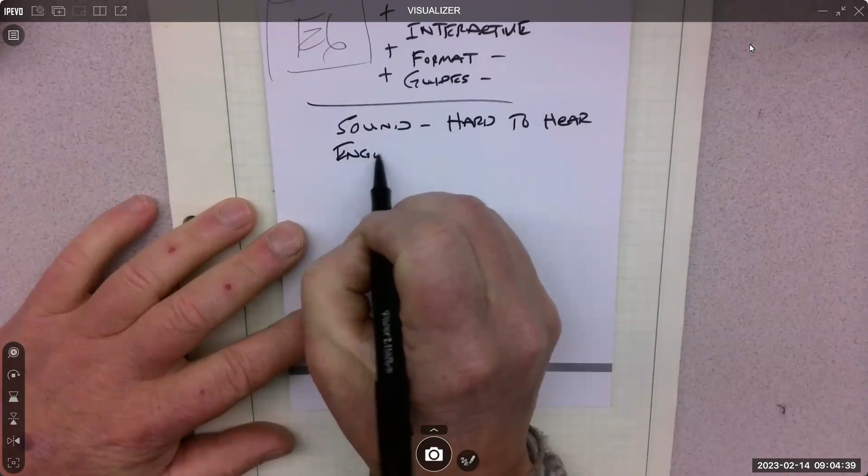Seeing the actual spaces, like there's an office space. Yeah, and it was nice to at least lay eyes on that, get a feel for where they're really working, they're locked in. There was one upstairs too, but visually we're not allowed to see that. Yeah, there was an upstairs, and I'm guessing that's where their cubicles were or their offices, whatever they have.

Yeah, it's nice to see though, and honestly every field trip is different. Like you go into Leatherman's engineering office and it looks different than an E6 office. And then I was just at Marx Brothers and they took me into one engineer's office.

And it was like, I've never seen so many big screens on a computer that were all curved. His desk was round and all these displays were curved and huge. I was like, whoa. It was cool, but I wouldn't want to sit in that little focal point for 8 hours.

All right, what else do you wish? We're doing I-like and I-wish on the field trip if you just walked in. So E6 has asked for feedback from you, not from me.

I think the things that, like, confidentiality that they were talking about, because there's probably a lot of things they can't tell us, but they'd rather. Yeah, I think the only thing they didn't answer that I asked was actual production numbers. I was curious how many they're producing per month. And I got a lot was the answer.

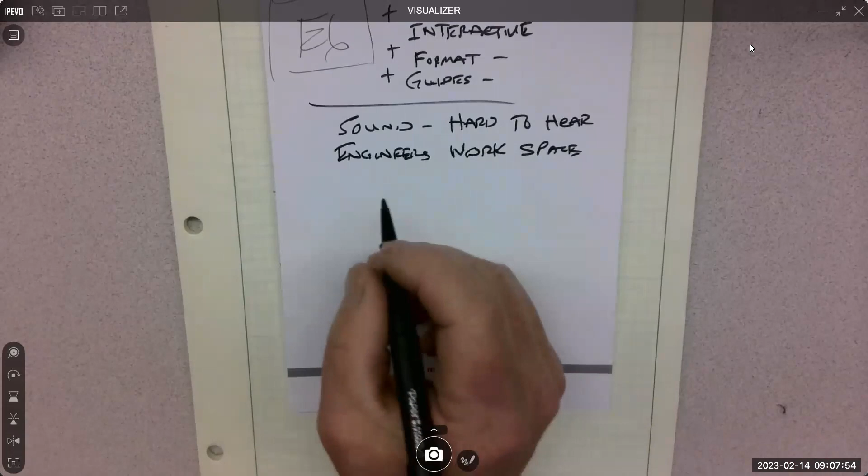Yeah, yeah. Good. It was close, I like that. I didn't make you drive downtown Portland or something. We've been to a lot of further places away that's complicated.

So I went to the Bonneville Power Administration at Cascade Locks. Went through the dam. It was a super cool tour, but that was a solid four hours.

And we didn't get engineers. Like, all that work to set this up, and then we just got Ranger Rick walking us around, and he couldn't answer any questions about the turbines, the generation systems, and the backup systems. Yeah, it was cool walking through, but man, we left with a lot more questions than we had.

All right, I think that's pretty good. Any questions about anything else so far? You're supposed to be working on the project. That is correct, all the time, day and night. You should be working on this project. There should be no other classes that you have other than this one.

Is there some kind of specific documentation during the prototype build? Nope, prototype build is literally bring in a functioning prototype. I will ask you what questions you're trying to answer with your prototype, because that's why we build a prototype, we're not sure of our own design, or we just want to confirm that this design is going to work. So we build a prototype and we go, oh, that didn't work, or this has potential to work.

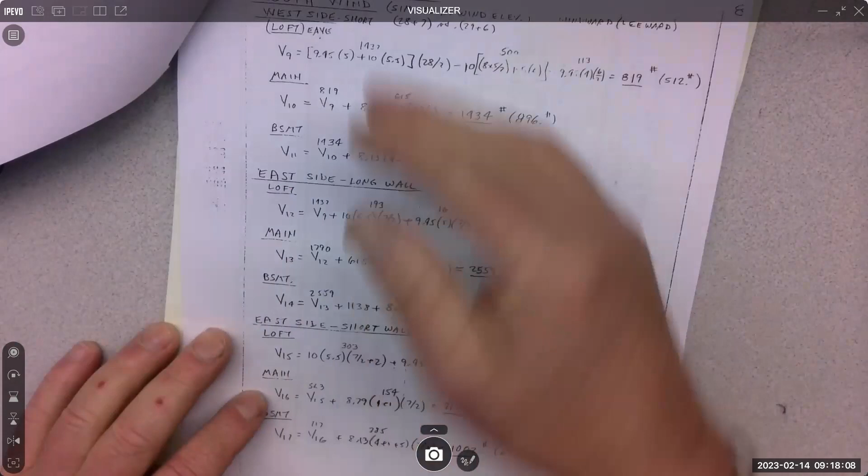So here's his. This looks like a wind analysis, south side, west side short. This must be a west side short wall. And then he's just flowing, left to right, top to bottom, working his way through it.

Okay, these are all shear calcs because this is a lateral load document. Lateral load is the structure doing the lateral deflection, right? Like a wind load or seismic, although he's very careful not to put seismic on there—he doesn't want that responsibility. But again, just fairly nice and neat, flowing through the equations.

Shear is V, so we're not going to do shear today. We're going to do bending, but that's all right. Make sense? Kind of like the flow and the image of what we're looking for.

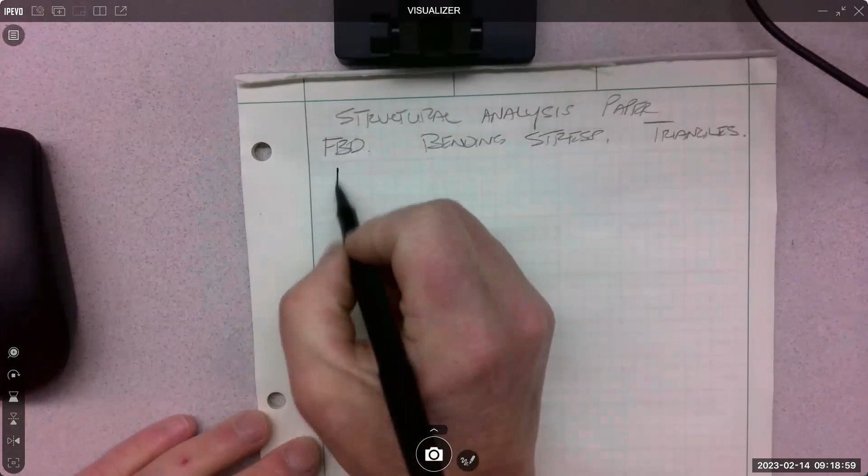All right, so you're probably going to end up with these pieces of the structural document. You're going to end up with a free body diagram. That's what this is called, free body diagram. And that means we're going to take a system and just draw it and put the vector loads on it.

So the example I'm going to use is this one right in front of you, where I have a beam laid out between two supports. Like if this was yours, I think we're 8 feet apart—is that correct? Yeah, so let's say it's 8 feet. I think this is a bit longer than 8 feet, but that's all right. The free body diagram for that would look something like this.

Simplified beam. And then over here at this point, the object has weight, right? It's acting down. So all these forces we want on the free body diagram. The weight of this thing, I'm going to say, is 2 pounds. Okay, we have scales, you can weigh stuff. So your numbers will be real, and you should weigh them so you can draw a good free body diagram.

But anytime we put in the weight of an object, anyone know where that goes? Ben's not here yet, he's got to take a few hours to wake up—he told me that yesterday. Weight of an object—so the weight of me, if I was going to stand on this table, where do we put my weight? Do you think it's going to be out here on my arm, hanging down? It's going to be what? Yeah, it's going to be center of gravity.

Exactly, geometric center, right down through the middle. And that's an approximation even, because I'm not homogeneous. Anyone know what homogeneous means? The same throughout—I'm not made of the same material, I have all these different kinds of materials in me. Even this piece of wood is not homogeneous, right? What's different about wood? What's it have? Yeah, grains, knots, all kinds of deformities, right? It is not homogeneous—we like to say it is, but it's not at all. All kinds of defects in it too. But for this analysis, we're saying it's homogeneous.

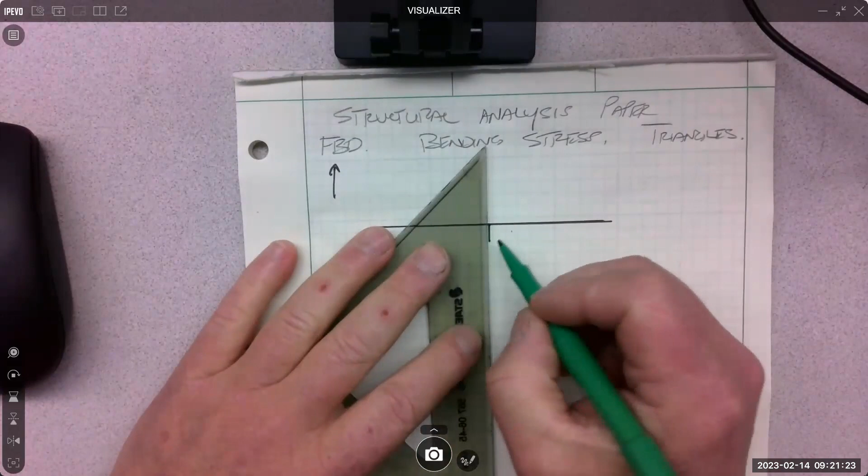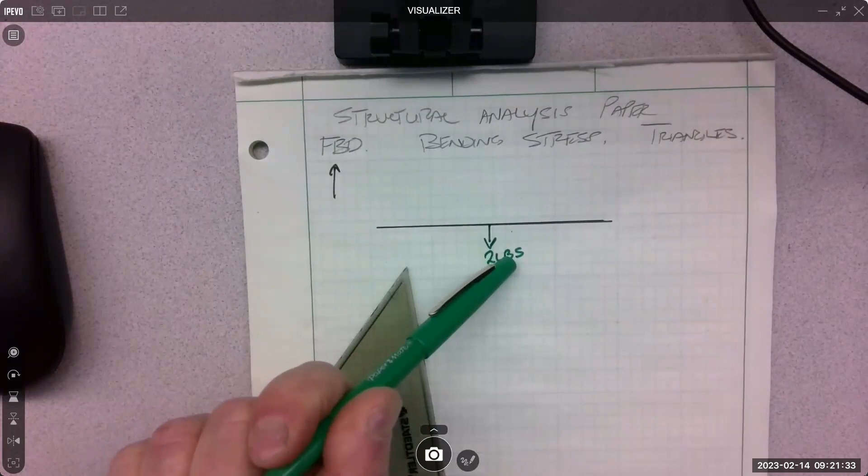If this thing weighs 2 pounds, then I'm going to take the 2 pounds and put it through the geometric center. 2 pounds—we put it in as a vector, which is just a line with an arrow on it. Okay, that's a force vector. Now what's happening at both sides?

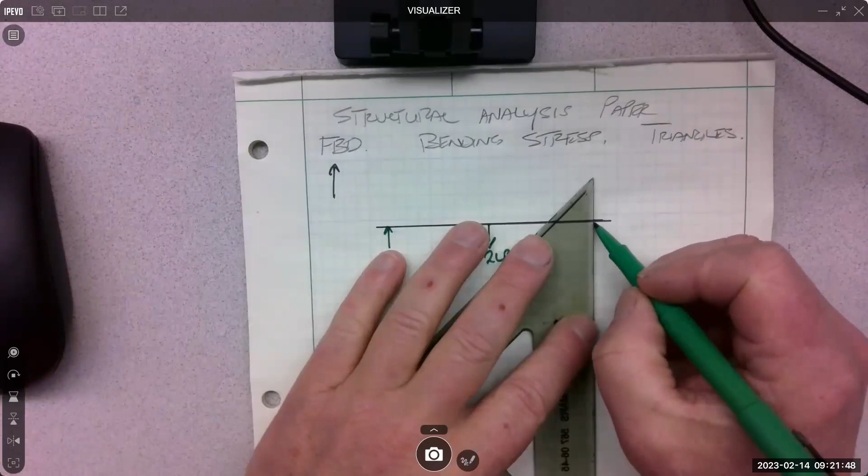Because this thing's just sitting here, right? It's not going anywhere. There's supports on both sides, right? So the table is pushing up and pushing up. This thing called equilibrium means that all the forces in all the directions are equal to zero. If they're not equal to zero, something is just flying around, okay?

If I didn't have gravity, I'd just fly around, right? If I weighed too much, I'd sink into the ground. If this building weighed too much, it would sink into the ground, but the ground must be pushing back up to hold the building in place, because it's static currently, right? So how much has to be here and here? We're kind of symmetrical—we got 4 feet and we got 4 feet.

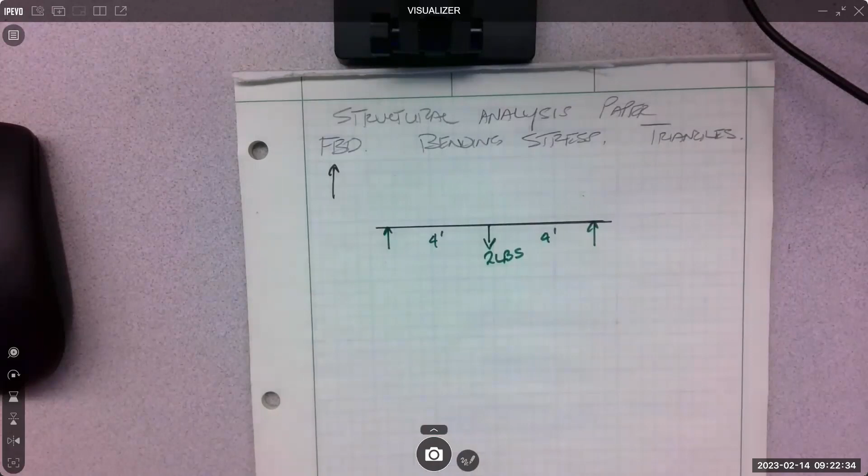So if all the forces in the y direction have to be equal to 0, how much does this have to be? Roughly a pound. Probably not roughly, it's got to be exactly a pound, right?

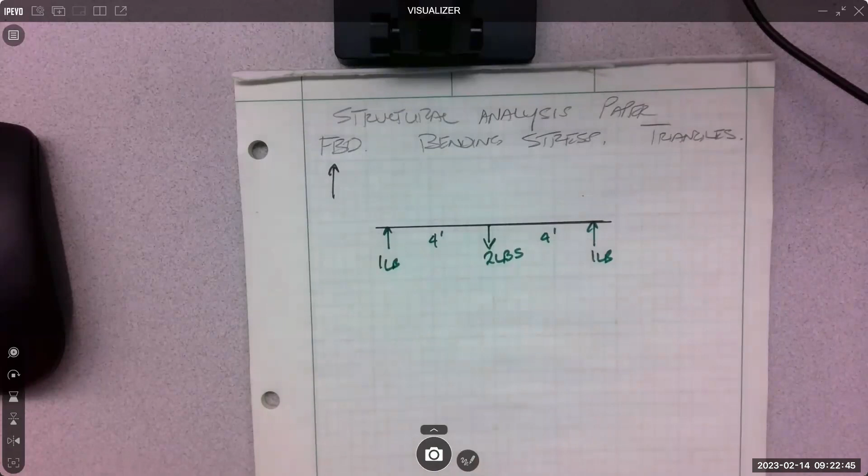For this to be true, we write that sum of forces in the x equal 0. That's equilibrium. Sum of forces in the y equals 0. That's the case we have. And then there's this thing, sum of moments equals 0.

Anyone know what a moment is? Yeah, that's what some normal person out there would think, but engineers, we think differently. We have to name things special, so no one else knows what we're talking about.

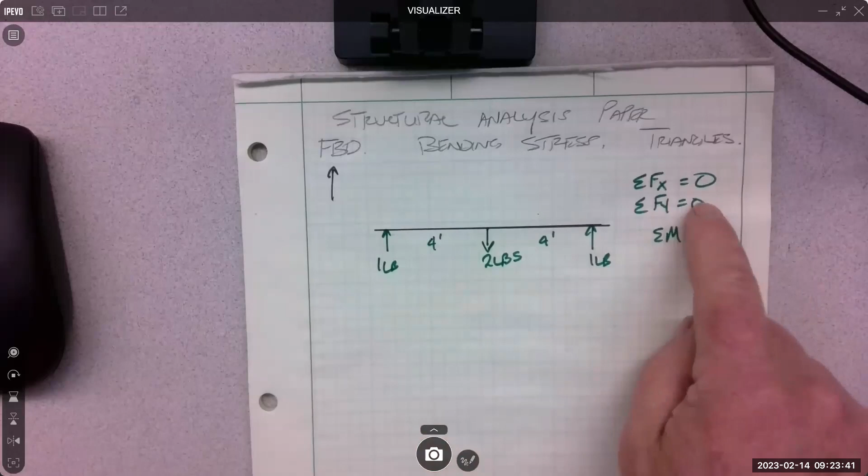A moment is... so sum of forces in the x, everyone knows the x direction, right? Positive x is that way, negative x is that way. So forces in x is lateral movement, x direction. Forces in y is what? Up and down. Yeah, so those are the two translational forces and directions that we have, x and y.

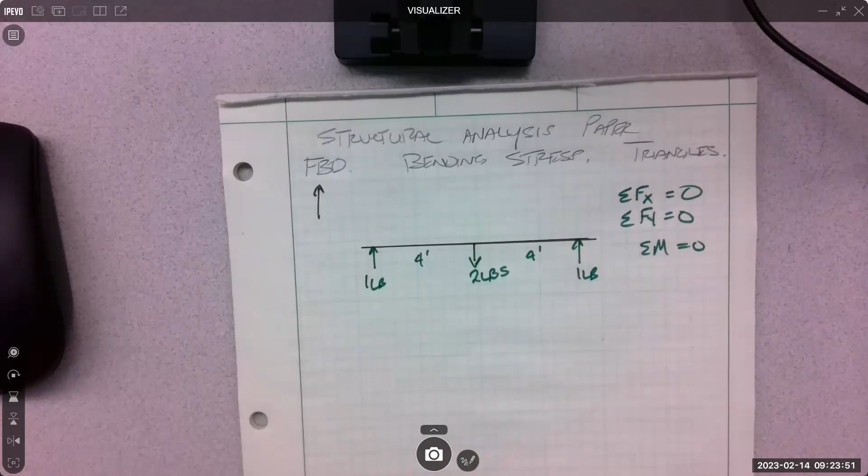But there's another effect that happens due to forces, and that is rotation. So a moment is a rotation, better known as a torque to most people in the real world. That's like putting a wrench on a bolt, putting some force on it, and it rotates, right? So that's not translating the bolt this way or that way, but rotating it. Those are the 3 effects that we deal with.

If all of those are 0 on this structure, it's not moving. If there's an extra moment somewhere, this thing is tipping over. If there's extra y forces, it's sinking into the ground. If there's extra x forces, then it's like shaking off its foundation. Okay, but that's it, all of those.

Ben. At some point I'll probably label it up. Yeah, because we're going to have to do more shenanigans. Ben would like me to label all my points.

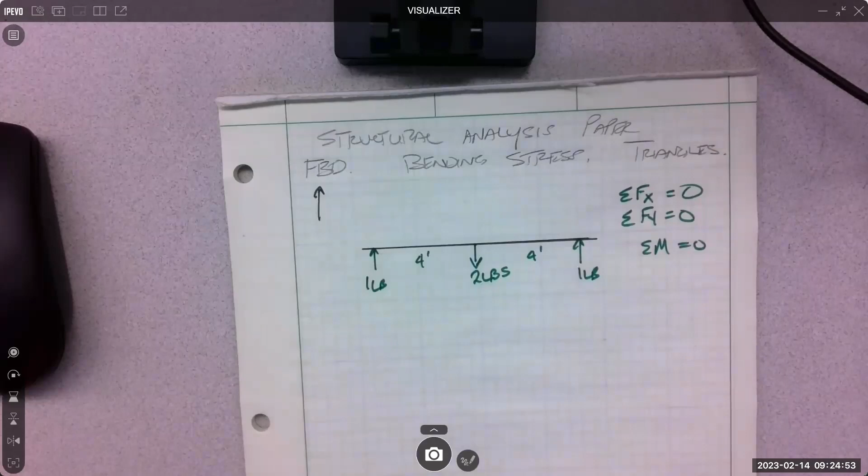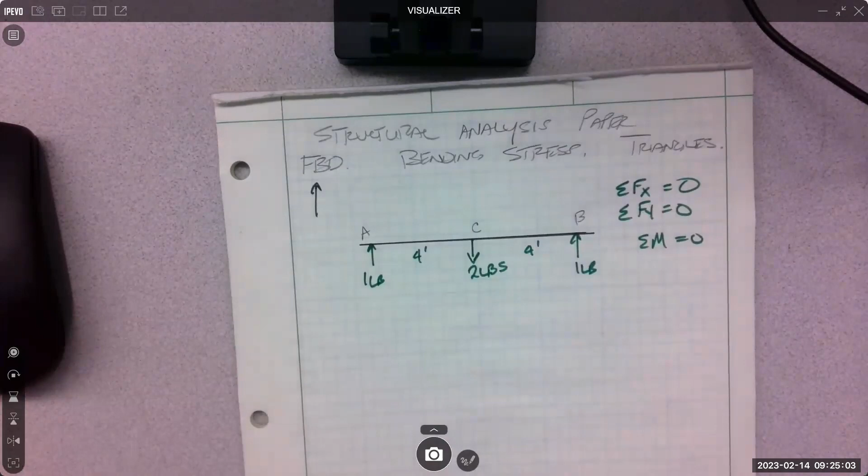So I have a point A, a point B, and maybe a point C. And it's not a bad idea because then I can say, hey, let's look at C, or hey, let's look at A, right? Okay, but that's a free body diagram.

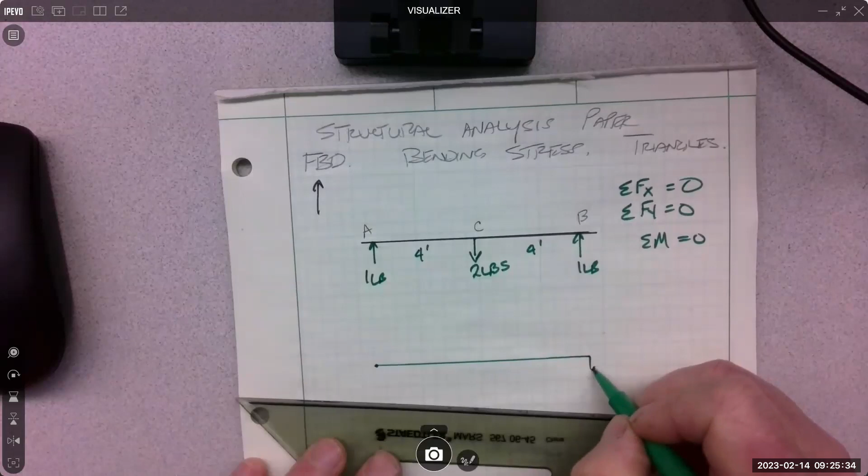All right, if you're going to take your 4-ounce weight and put it on the end of a stick and then just go like this and hang it out there, everyone follow me, like a cantilever or a fishing pole type thing, then the free body diagram looks different. It's still a pole, and we still want to draw it as a snapshot in time, so maybe here's my 4-ounce weight. I'm going to call it 0.25 pounds, right?

So a free body diagram is just a snapshot in time, and it's usually the worst time, like the worst loading condition. That's why I drew it like this. I didn't draw it straight up with the 4 ounces hanging straight down because that's not a bad loading condition, unless your pole is super flimsy and then it buckles, but that would be a whole different analysis, right? So I draw it in the condition that I'm really worried about, that condition.

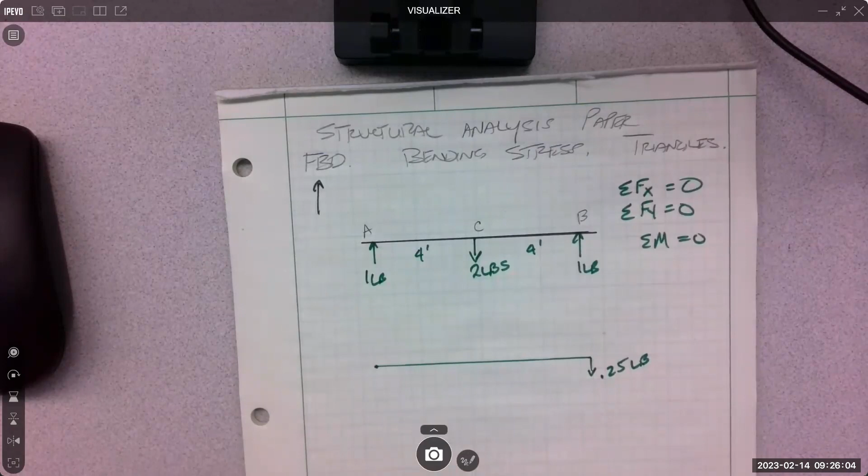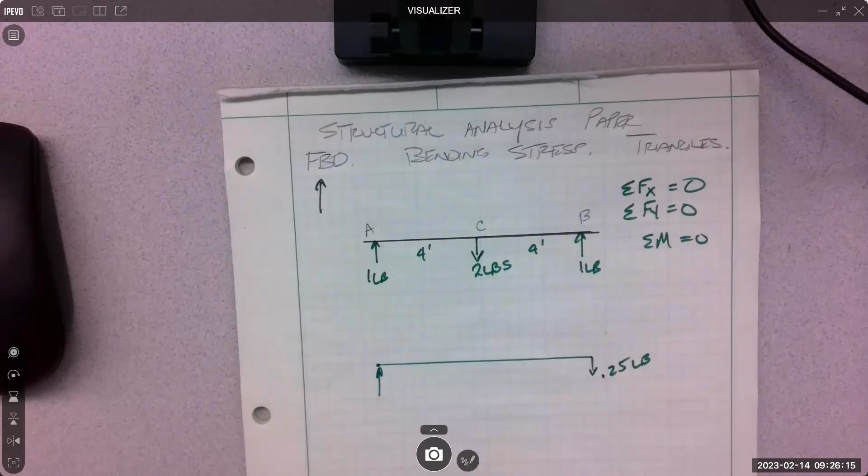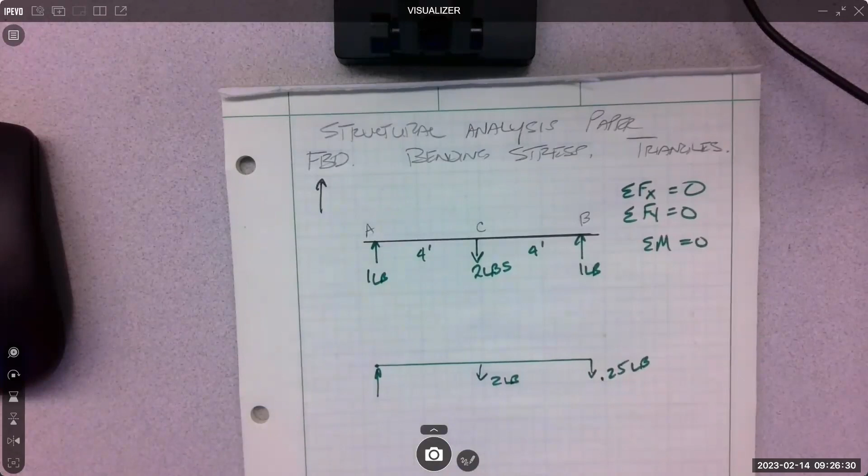So what's fighting this down force? Yeah, whoever's holding it is putting in an up force. And how big would that have to be? Oh, we should probably add our 2-pound structure. Right? It still weighs - I'm going to use the same structure. So how much is coming down? 2.25. So how much has to go up here? Same thing.

Right? But what else is happening? There's no up force out here. What's this pole trying to do? Probably bend, but if we just kind of didn't support it, what would it do? It would rotate. It won't fall because we're still going to give it this up force. But instead of my arm holding it out here, if I just let go of it, it's going to rotate. This thing wants to rotate. All this wants to rotate.

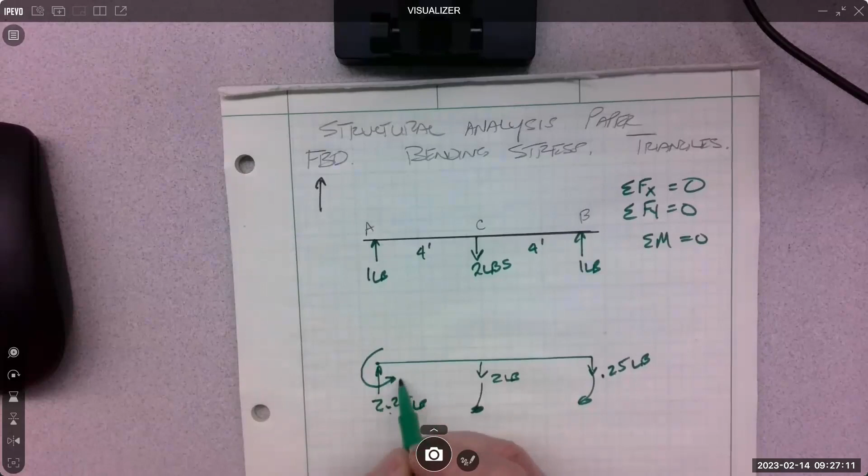So then we have to fight it with what's called a moment. So cantilevers - this is a cantilever where there's no support out here. We have to have a support system that will fight that moment. You know, if you're fishing, it's you holding the fishing pole. If you let go of the fishing pole, the pole rotates, is gone, right? The whole structure also has to resist that rotational effect. If it doesn't, then it breaks, right?

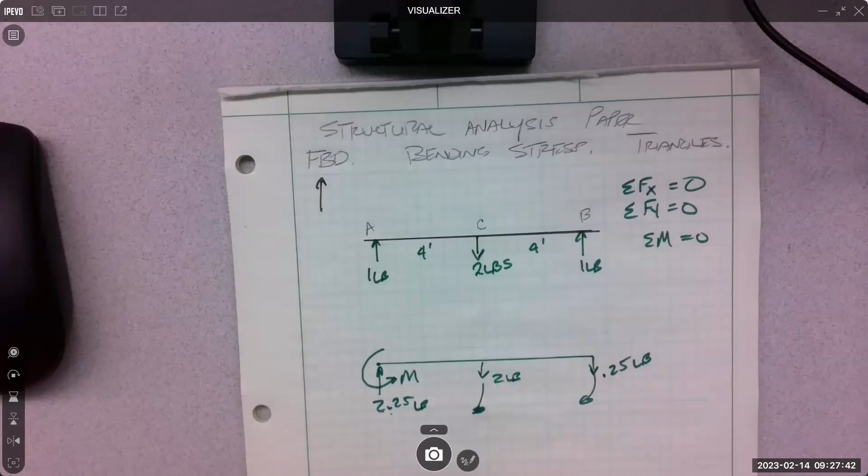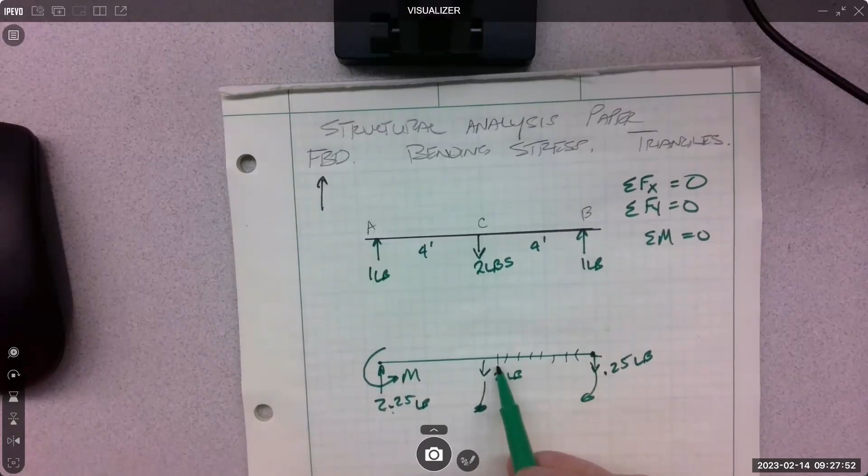And out here at the very end, there's no rotation. That's just a free end kind of dangling out there. But as I walk it back, that moment gets bigger and bigger, that rotational effect, until I get right here where this moment is huge.

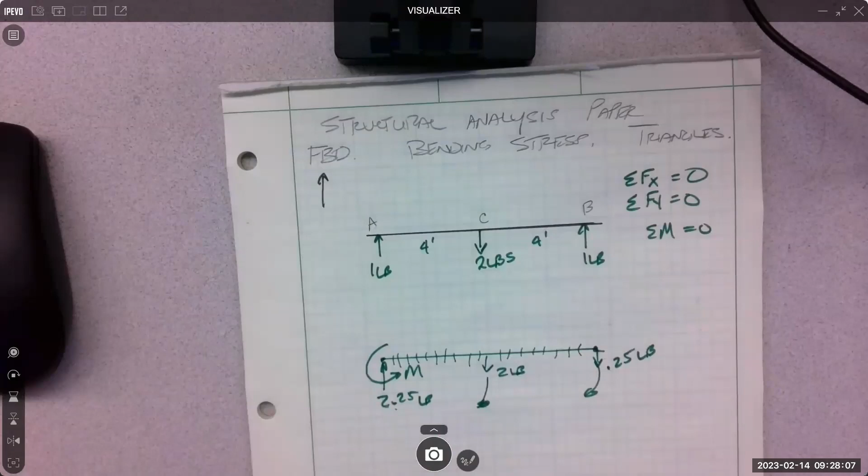That makes sense? Just in super basic terms, kind of like, hey, this is how a fishing pole works, this is how a cantilever works. This is called a simply supported beam. It's got supports at both ends.

This is what we do. You drive across a bridge, you're hoping that it's simply supported at both ends with enough foundation to carry the weight of the bridge, which is way more than you and your car. The weight of that bridge is enormous. So the overall structure of a bridge is really to hold itself up and then let you go across it. It doesn't really care much about that.

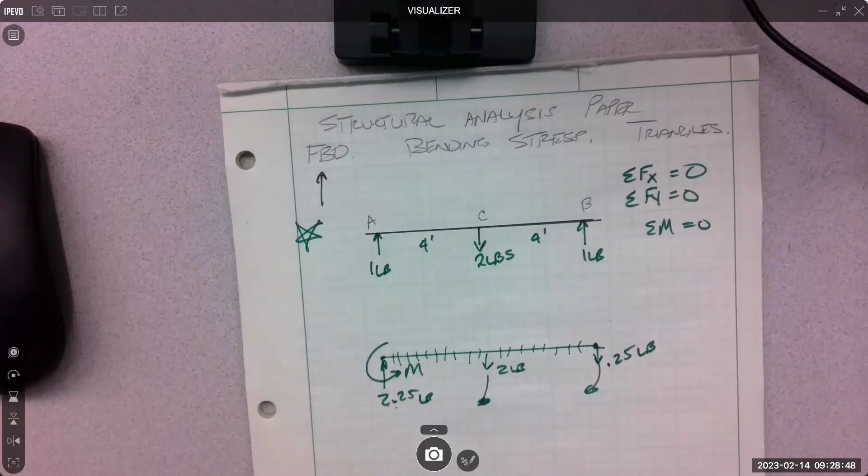Okay. Simply supported bridge, correct. Yeah. So really what we do with bridges, let's talk about bridges, because that's another area I wanted to hit on, because they are typically built out of what?

Yeah, very few are just straightaway beams. You'll cross a few that are just the smaller bridges, overpasses that are just big concrete beams, right? Massive concrete beams, have no upper structure to them. That's just a beam bridge, right?

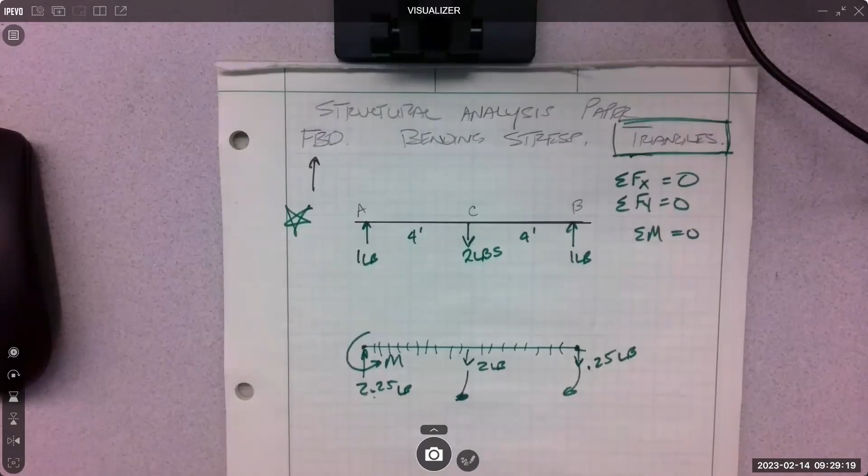Those are usually smaller. If you're going to cross the Willamette, then you're going to go across something that looks maybe like a triangle. So maybe it's one big truss. We call these trusses, or triangles. Or maybe it's a collection of all kinds of little ones.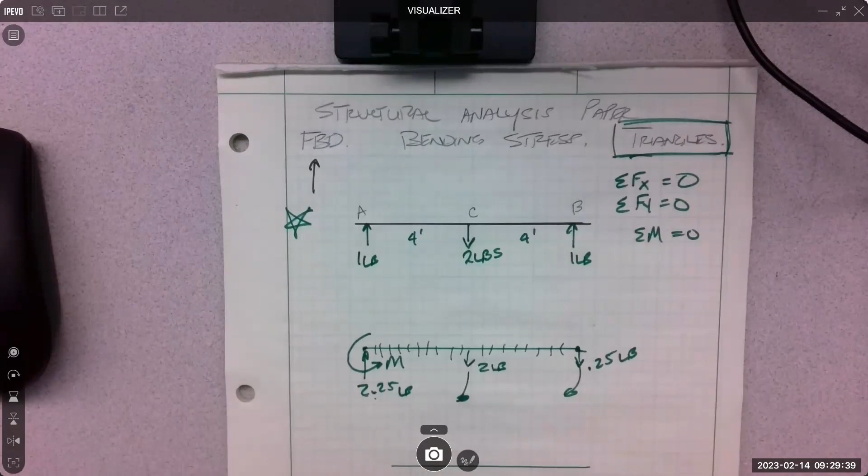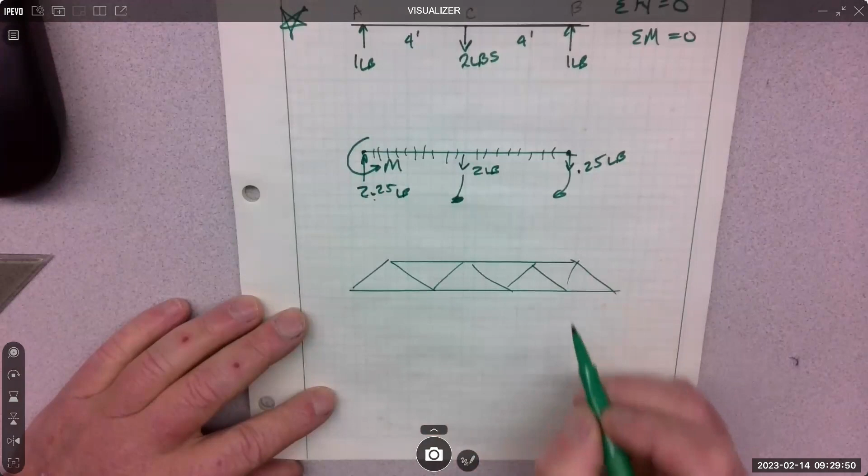For the sake of time, I'm not going to get too fancy with my drawings, but there's all kinds of them, right? And then we can even drop some verticals in. Sometimes we don't drop verticals in, but then we're going to simply support it.

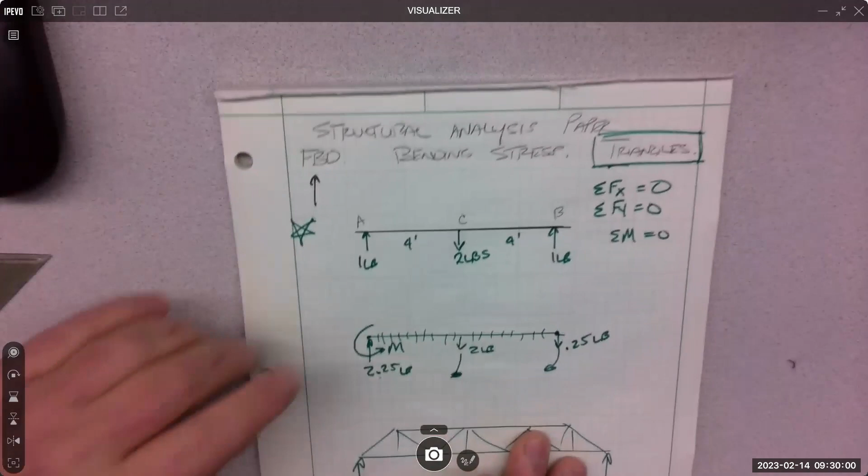This is no different than this. The worst case scenario for loading condition is a big load right there. The entire weight of this bridge acts through the geometric center.

Okay, and then when we drive our car across there—and actually we don't use cars, we use big semi trucks typically—but as we drive whatever we're going to drive across there, we put it right in the middle, and that's where we do our analysis.

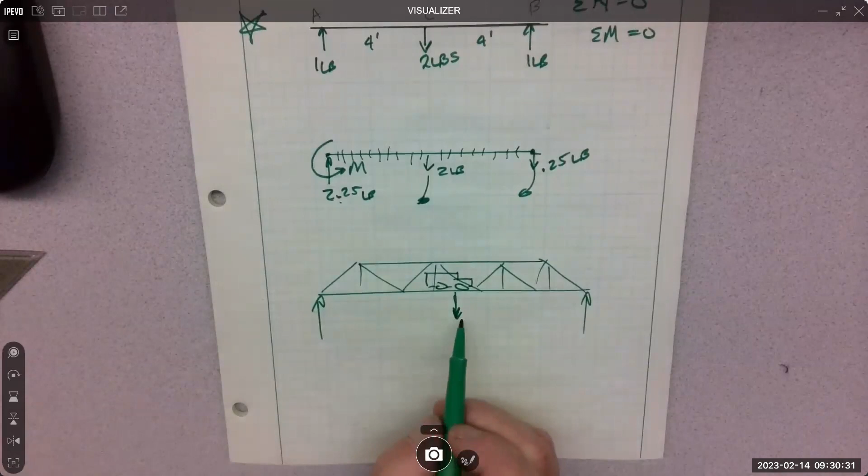So for example, the large bridge downtown Portland—why can't I think of the name of that bridge, our biggest one—not the Fremont, maybe it is the Fremont, the giant one, yeah, the double decker. Yeah, that one, its loading design condition is our worst snowstorm, our 100-year snowstorm.

So we put a bunch of snow and ice on it, and then we line it up, upper deck and lower deck, with the heaviest semi truck that is allowed to go across it. Stacked up traffic jam, full on. That's the loading condition that thing's designed for, which it'll probably never see, right?

But if you go across that bridge and you ever get the chance, like in a traffic jam and you're stuck on it and the other deck is still moving—like if your upper deck stopped and the lower deck is moving—that thing is bouncing a solid 3 inches up and down, just really flexing nicely. Super creepy, but it's cool.

Yeah, so we designed flex into them, right? But notice what it's made out of: triangles. So if you're having rigidity problems, think about adding some upper structure or triangles. That will help your design.

Okay. I'm not going to go into any analysis there, but when you take statics, you'll learn how to transfer all these loads through the structure.

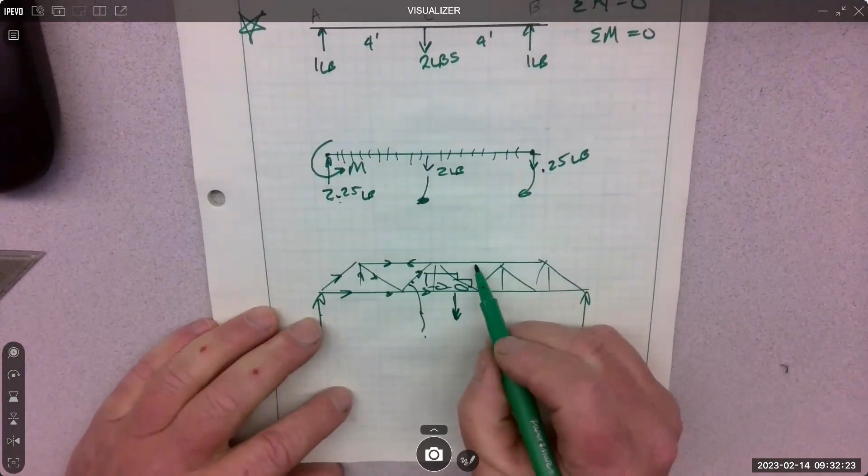And calculate it. So as we do that, as we learn that, then we look for the highest loaded member. So maybe it's this member that's the highest loaded, and then we design to that highest loaded member, right? And then we make all the members typically the same. Some of these top chords might be smaller, some of these bottom chords might be bigger. But that's essentially what you learn in statics, is how to transfer those loads, both through a structure and through a truss system.

Because if you crawl up into your roof, most of your roofs, if you're in a home or even an apartment, if you get all the way up to the roof, that's going to be a truss of some kind. That's what we do. All right.

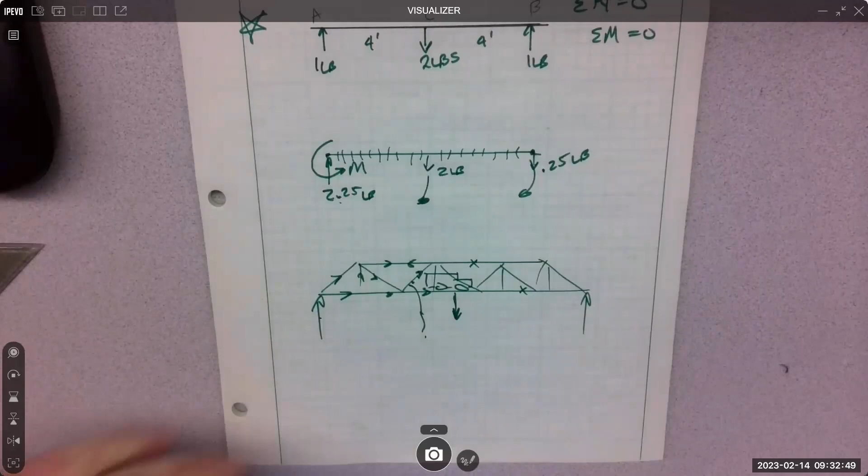The other thing is bending stress. This is a calculation I hope you do. So we need to talk about bending stress. This is S for stress, B for bending.

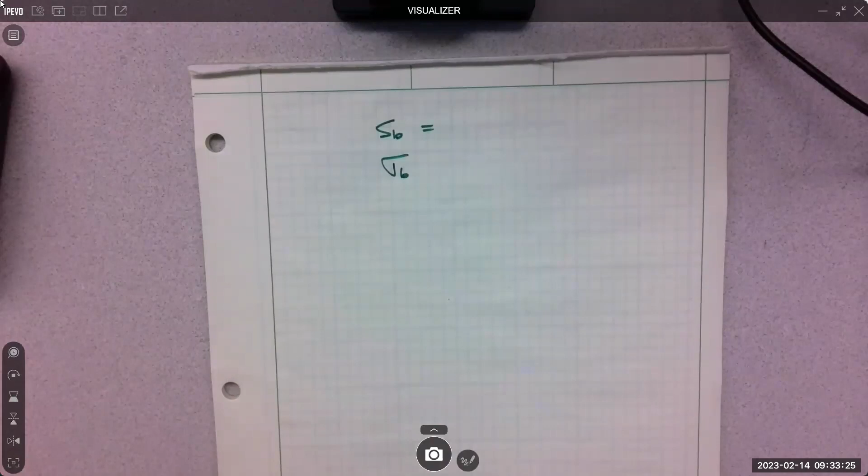So some will use sigma. The Greek letters come into play real quick in engineering. When you go through your statics, your strength, your dynamics, your fluid mechanics, you get a lot of Greek variables. I don't know where that came from, but we've done that forever. So some books will use S for stress, some will use sigma for stress. B would refer to bending stress.

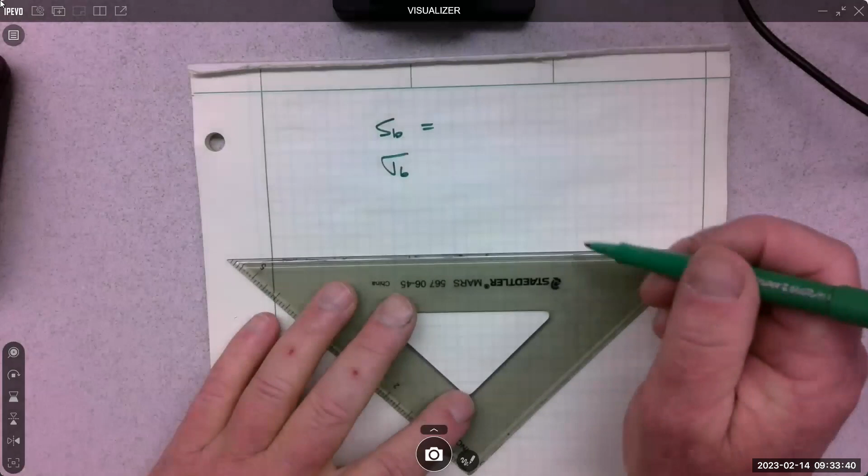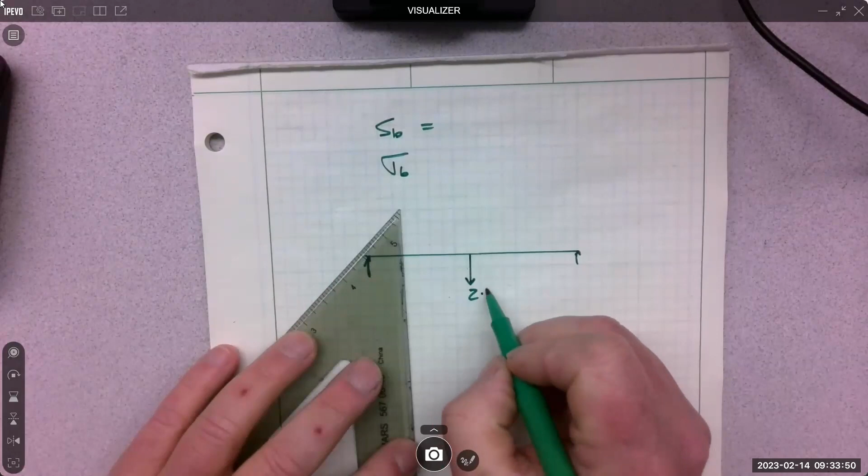Going back to my simple system right here, and I'm going to stick with 2 pounds, 2.25, because my little ball, my 4-ounce weight is coming across and I'm stopping it right in the middle. That's kind of the worst loading condition, right? So now I've gone to 2.25 pounds and I have 4 feet and 4 feet. Bending stress is MC over I.

So we have to understand the 3 variables that are in bending stress. The reason you would calculate a bending stress is you would want to compare it to a material. So if I'm using wood, I can look up Doug fir allowable bending stress. The wood industry has dialed that in for me as an engineer. The steel industry has that dialed in for me as an engineer. They know the stresses of all the different alloyed steels out there. Strength of materials is where you'll learn all about those. But what we do is we calculate a stress and then we compare it to something.

If you're using cardboard, you got to find the stress, bending stress of cardboard. There's some out there, there's not a lot of great data out there. So find what you can and use that as your comparison. I'm going to do it to this wood, and I'm going to call this wood Doug fir. It's a common wood in our area. And the allowable bending stress, so SB allowable, I'm going to say is 900.

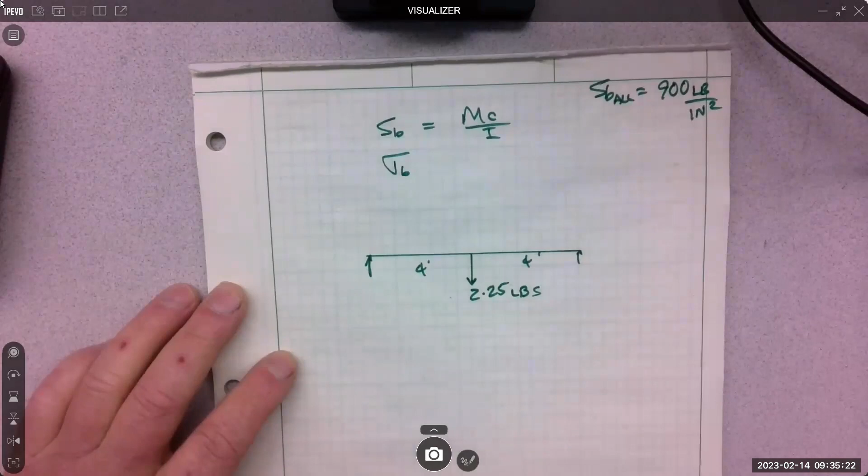So stress is in what? Check that out, what is that? Pounds per square inch, also known as PSI. It's like a pressure, right? And it is a pressure. It's an internal fiber pressure. It's a pressure on all the little fibers of Doug fir. It's not very high. 900 is pretty darn low, right?

If we think about mild steel, 36,000 PSI. Much different. Steel's a lot stronger than wood. That makes sense. But I have an allowable limit of 900. So I have to figure out, based on this load condition, how much bending stress is there on my little piece of wood, right? And then I make that comparison.

So if I come up with 900, what do you think? If I come up with 900 PSI of stress on my wood and I compare it to 900, is that a good or a no good? It's no good because we're right at the limit. Yeah, so maybe good, but with no factor of safety at all. 0 factor of safety. Well, just so you know, the wood industry's already done all that factor of safety for us. So we can go right to an allowable when it's given. That industry has done all the factors of safety for the material.

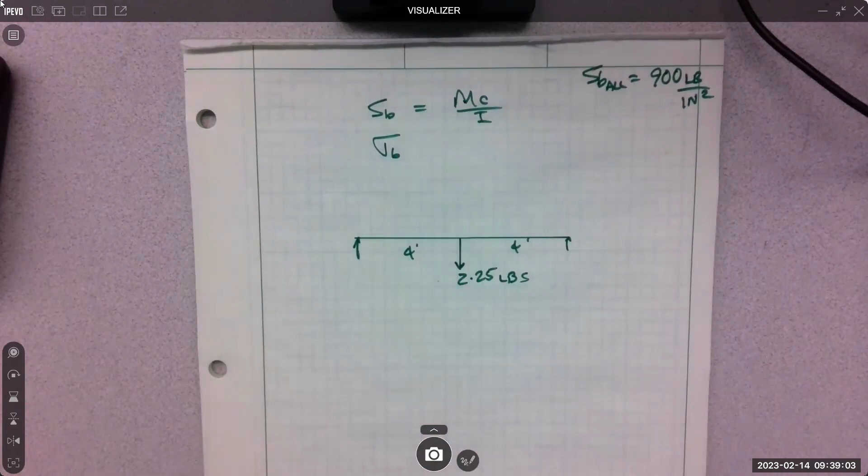The way we calculate this is we have to find the moment based on the loading condition. From our free body diagram, we find a moment, and then we have to calculate a C, which is very easy, I'll explain that. And then we have to do inertia.

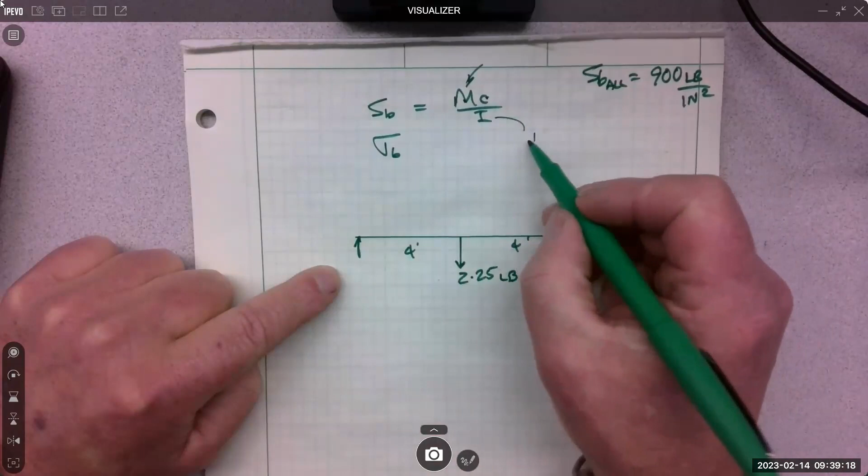When everyone thinks of inertia, they think of moving parts. This is not moving parts. This is static, it's equilibrium. It's just sitting here, it's doing nothing. So this is what we call area inertia.

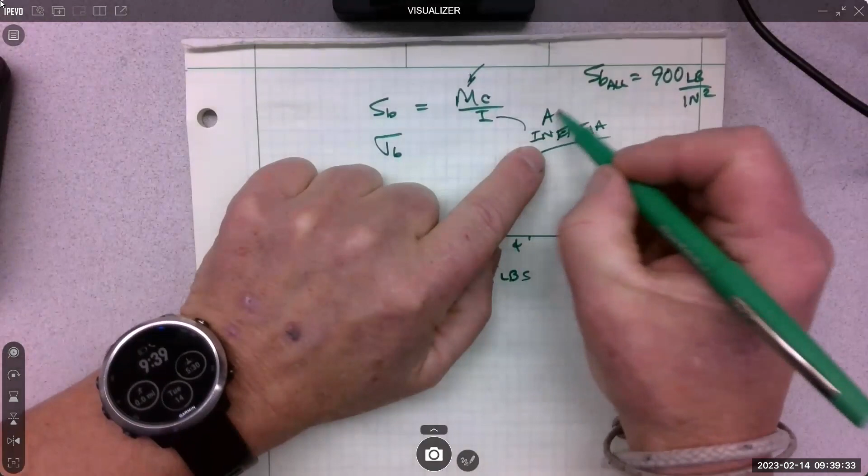It has to do with the cross-sectional area. Does everyone know what a cross-sectional area is? So like you have a tree growing, right? And I take a saw and I chop it in half. What's that area look like? Yeah, it's round, kind of round.

That's the cross-sectional area. So here's my beam. What's the cross-sectional area look like? I don't even need the dimensions, but what is the shape? Is it square or rectangular? Yeah, so that cross-sectional area looks like this, in that position. The other position it could be in would be like this. Everyone get that? That's cross-sectional area.

Both C and I deal with the cross-sectional area because it's so important to its ability to resist bending, and that's what we're talking about, resisting bending. Notice that C and I have nothing to do with what it's made out of, it's just the cross-sectional area.

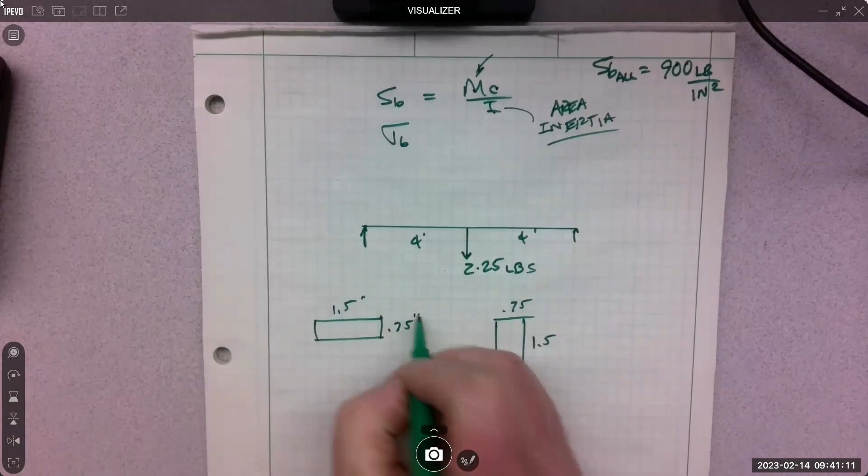That could be a piece of aluminum of that same shape, and we're going to say it's 1.5 by 0.75 inches, okay? Cross-sectional area, that's all that is. C and I deal with this cross-sectional area.

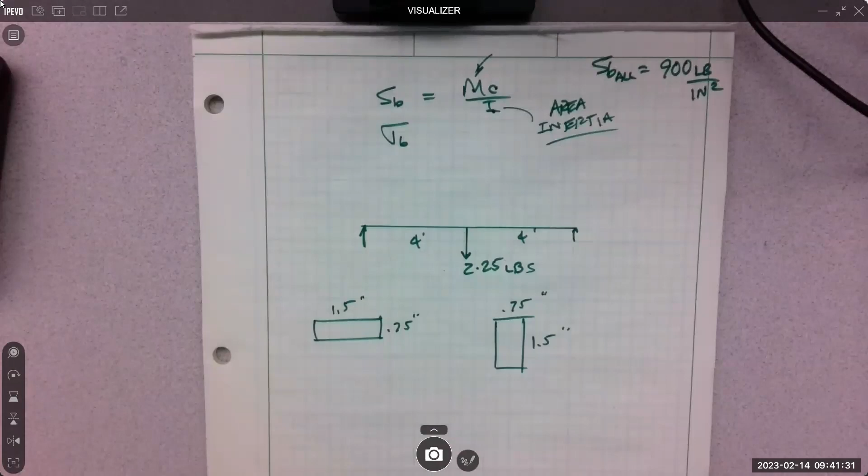This is area moment of inertia, I, and you can look it up for any shape, it's typically a very simple equation. So if you have a beam kind of like this, simplify its shape if it's complicated, and calculate an inertia. An inertia for a rectangle is base times height cubed over 12. I could have looked it up, I didn't need to, I use it all the time.

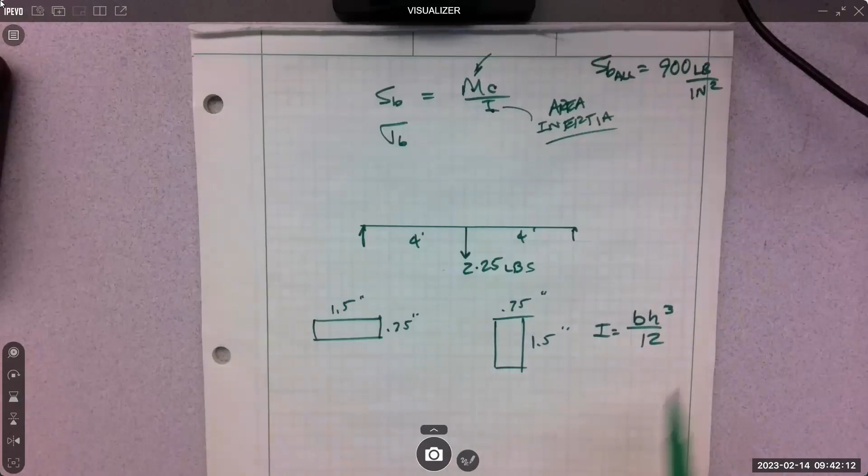We are addicted to the rectangular shape because if you're going to use a wood product, it comes in a rectangle typically, and we use a lot of wood products. That's why all our trusses in our houses are made out of wood products. So this gets calculated from the shape.

Here's a rule of thumb: the higher the I value, the better resistance to bending. This is just talking about shape, not that it's made of wood, it could be aluminum, gold, diamonds, whatever. I don't even care because inertia doesn't care, inertia just deals with the shape. The higher the inertia, what? Better resistance to bending, and we want to resist bending.

That's what we want. So if I calculate it on this shape, that's the current shape, I have it in that position. Agreed? So what is it? What's the base? 1.5. What's the height? Get your calculators out, divide by 12.

Come on, this is it, this is a gold mine. After this class you can go out and make some money doing this. Well, maybe not yet, but soon. What's my inertia value? 0.0527. So you went 1.5 and 0.75 and then you took it to the third, correct?

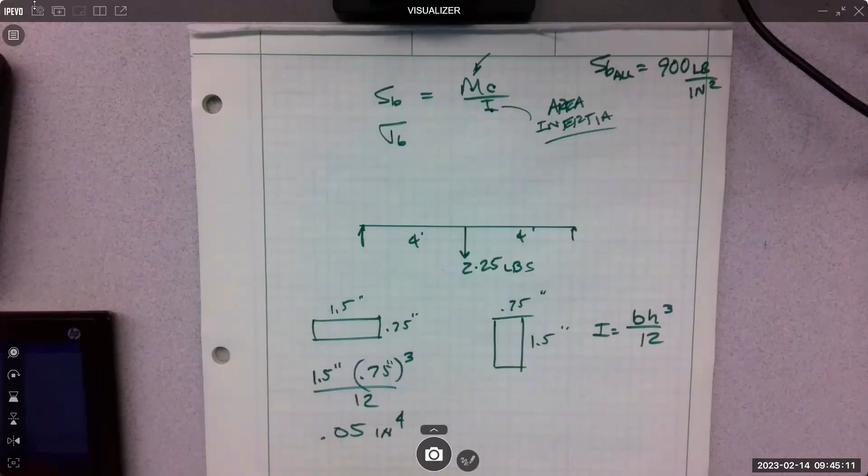And if you look in the book, it'll say this is a very abstract unit. It is super abstract, right? So small number, how do you think it does in bending? Not very good, right? Let's do it in this position. That's just taking this and putting it up on what I call the strong axis. What is it over here? Base is 0.75, height is 1.5.

You better figure it out. You need a calculator.

So 1.5 to the third is what? 0.75 times... 12 divided, I get 0.21. Anyone else get that? 0.21? Yeah, yeah.

Like magnitudes better, still a super small number because this is a tiny little beam. But everyone agree that 0.21 is not just a little bigger than 0.05? This is 50 thousandths, this is 210 thousandths, so we're talking magnitudes bigger here. This should resist bending, correct?

All right, everybody come up and walk by the beam. Come up, walk by the beam, put a little load in the middle, and then move on. Just push down on the beam, move on. So someone else, come on, keep moving, keep moving. Move, take that off of there. I didn't say put a load on it.

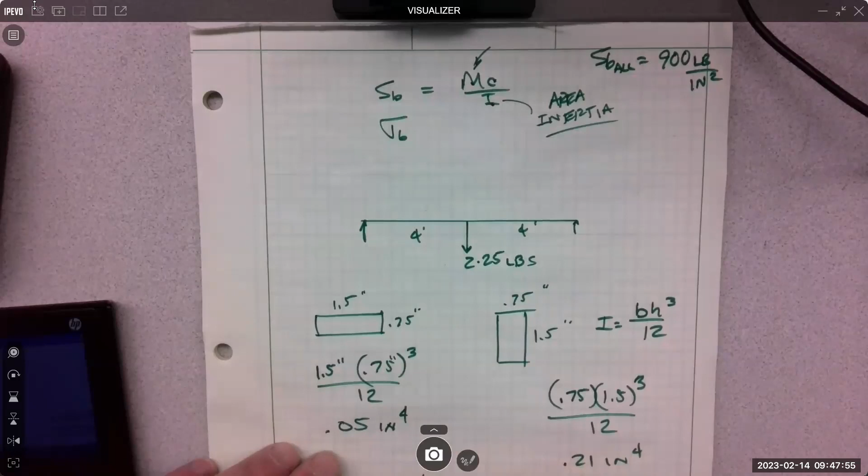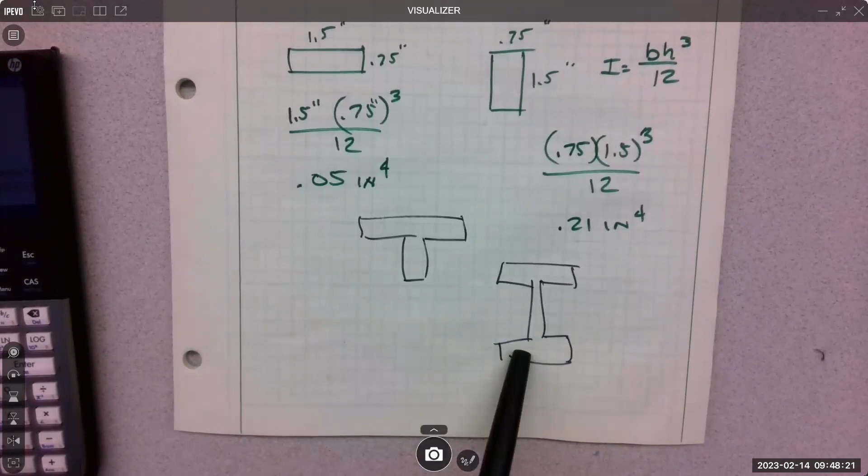All right, that's inertia. If you build a really cool shape like this, maybe a T shape, or maybe this. What's this called? An I shape. It's actually not, that's what the general public calls it. It's a W shape for us. W stands, I know, I'm sorry, but welcome to engineering. It stands for wide flange. So this is a wide flange.

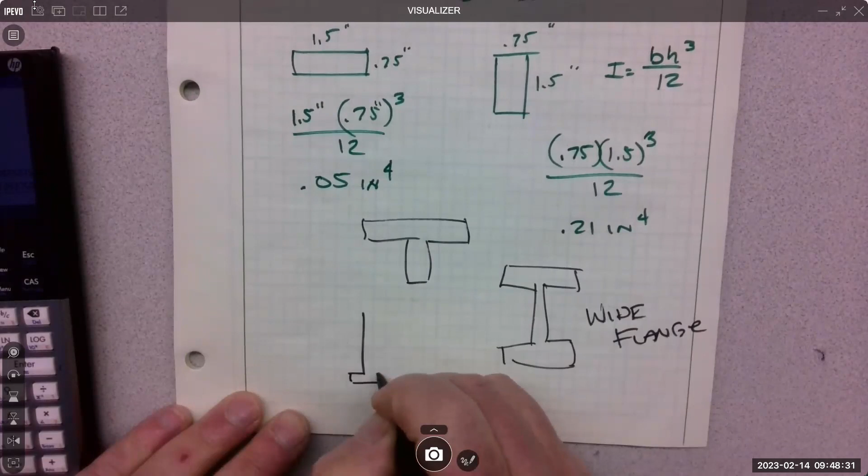We do have I-beams, but I-beams look like this. They're super tall and they have a tiny little shape. And we started with I-beams in this country. That's what we thought was like the cat's meow, man, it was the best. Well, the problem with I shapes is they want to rotate. When you load the heck out of them, they just want to go and rotate. So we fought that with developing wide shapes, and now we predominantly use wide shapes.

Like a ratio rule that separates? Not really, but it's so obvious. When you see the two side by side, it's like, oh, the I-beams, their flanges are so tiny. Like we get so much load out of this web. This is called a web. We get a ton of load carrying capability. That's why we did I's, right? We can just carry so much load.

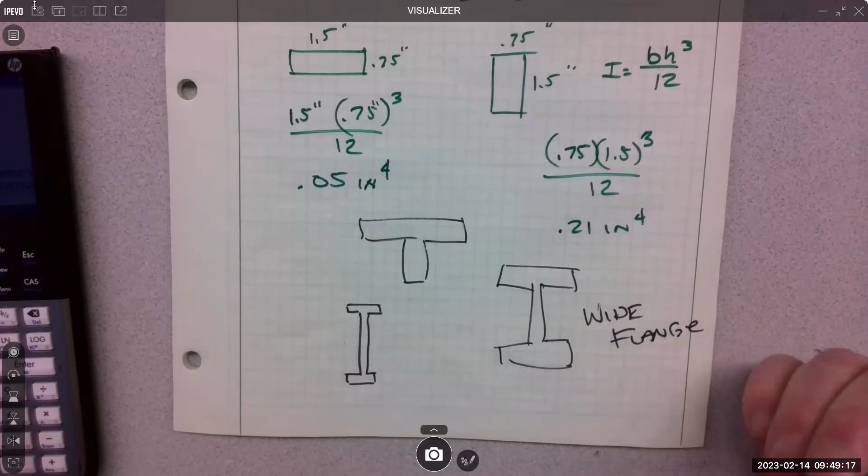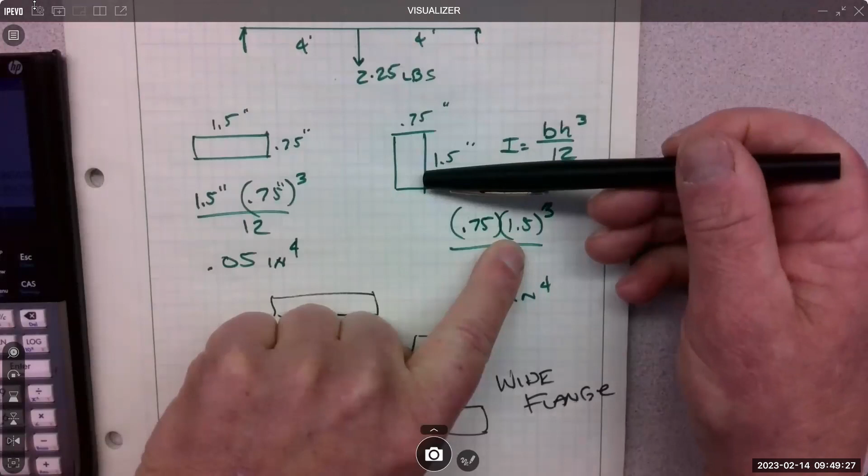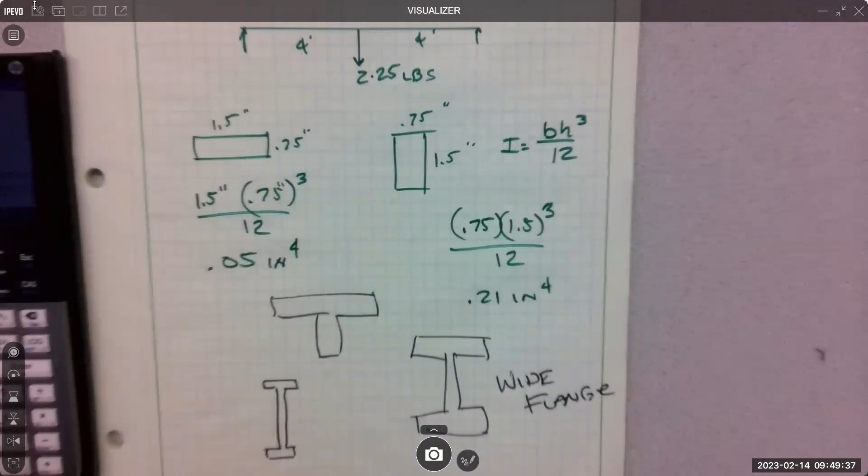The further you get away, what are we cubing? The height. So the bigger the height, the more resistant to bending. It was simple, we just make these things super tall and we can resist a whole crap load of bending. And then they were rolling over and failing. It's like, how do we resist that? Oh, that's rotation, we make this wider, right? It was trial and error, believe it or not, some of that in the beginning.

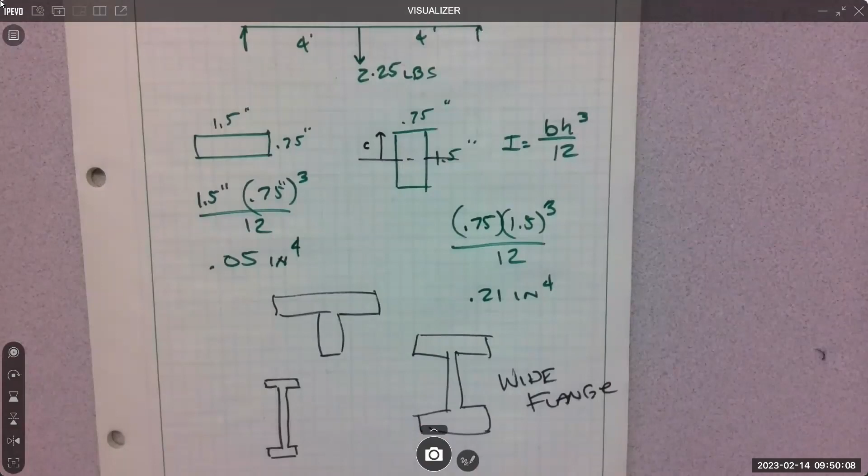All right, so let me do C. C is super simple. C is the distance from the geometric center to the outermost fiber. Yep, that's it. So you have to know your cross section, and you have to know where the geometric center is. That's not always easy. If it was a T shape, where's the geometric center of a T shape? I don't need somewhere, I need to know exactly where it is, right? Yeah, no, there's equations for it. Centroidal equations for all kinds of shapes, right? But it's right in here.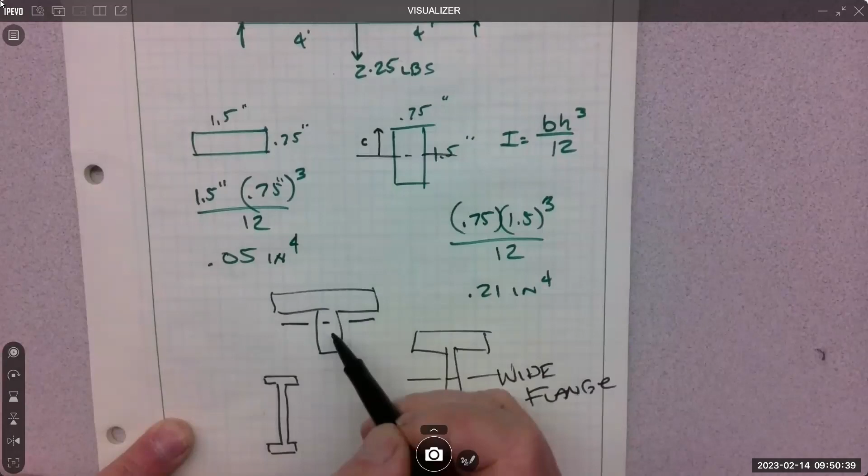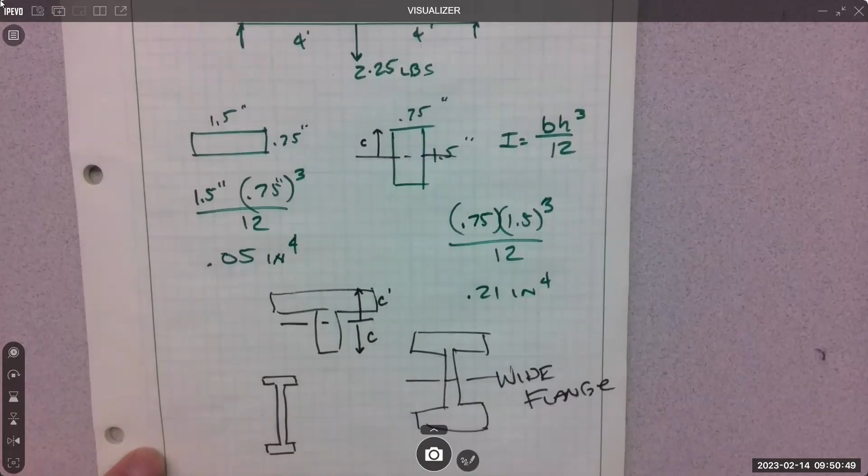And this is actually an asymmetrical shape, not symmetrical. Symmetrical, right, top and bottom the same. Symmetrical, top and bottom the same. Oops, not symmetrical. So what we're looking for is the largest C value, right? Because if we're going to bend something, I don't really want to break it. I'm not going to break it. But if we're going to bend something, what's happening to these fibers down at the bottom?

Careful, think for a second. Down here at the bottom, they're stretching, and the top ones are compressing. So we want to know the largest distance, because that's the one being impacted the most.

That's where the cracking and failure will begin, and those are the little fibers we care about most. So that's why we want the largest C distance. If we're doing straight bending stress, or straight tensile stress—tensile stress is taking fibers and pulling them apart, right? Compressive stress is pressing them in, and fibers react differently to both.

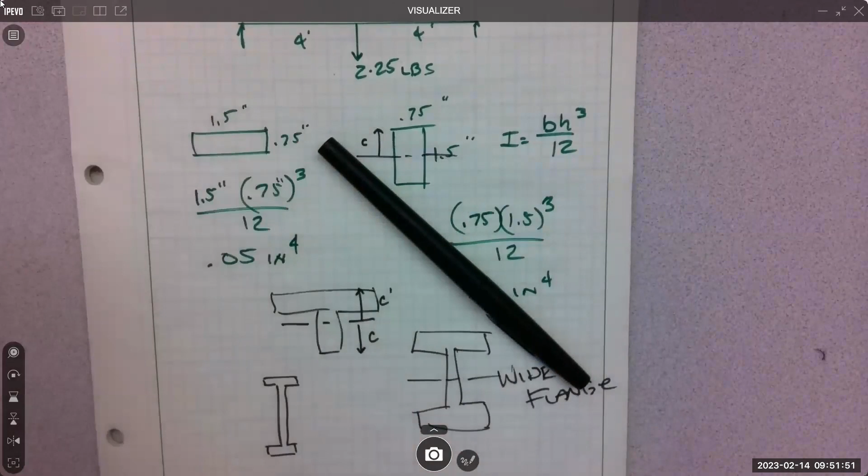So those bottom fibers, even though it's called bending and we're doing a bending stress failure, they don't fail in bending. The little fibers don't bend—they literally just tear apart due to bending. So these little fibers at the bottom shred apart, and then the whole thing breaks, and everyone says it failed in bending. Where it didn't—the little particles literally just tore apart. That's tensile, right?

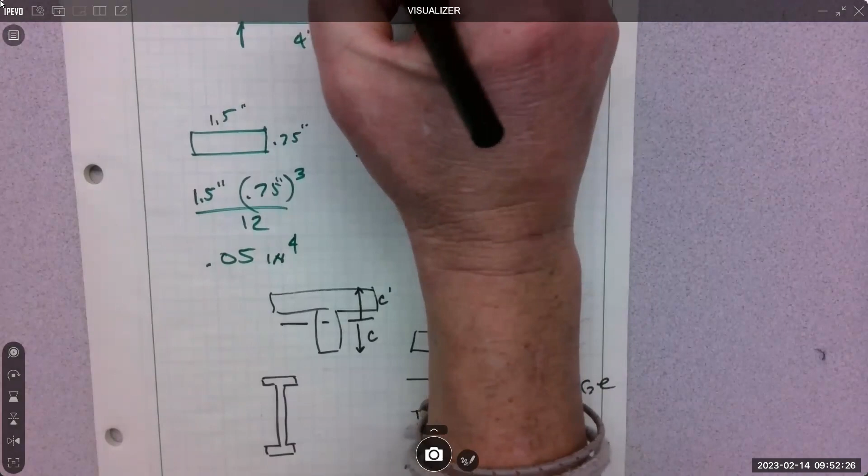So that's C, it's in inches. This is in inches to the fourth. C is in inches, this is in inches to the fourth.

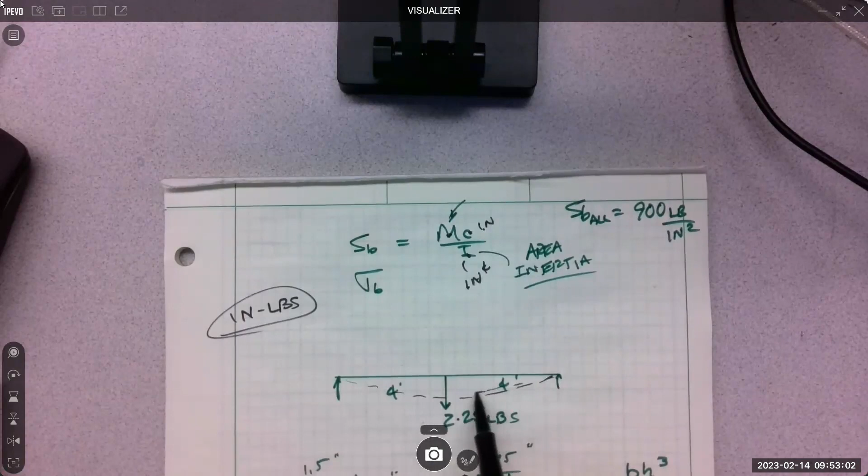We just need this crazy torque. Torque is the moment. Moment is inch-pounds—that's how we collect a moment. So we just have to figure out how do we calculate a moment, like we need these inch pounds. How much is this trying to rotate? It's static, but it wants to rotate, it wants to do this—it's going to bend, and that is a rotation. The ends rotate.

The way we calculate it is M equals force times distance.

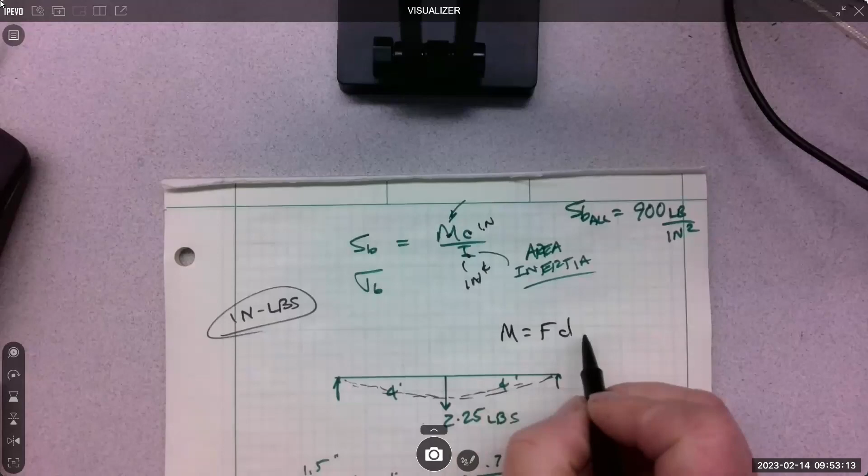Hang in there, this is nothing. You're going to have 2 hours of this kind of crap, and it's brutal. You're going to focus that whole 2 hours. You'll be exhausted and confused. Yeah.

Yeah, maybe, unless I just keep going. I got to get moment in and then I can let you go, man. And you want this—this is important stuff.

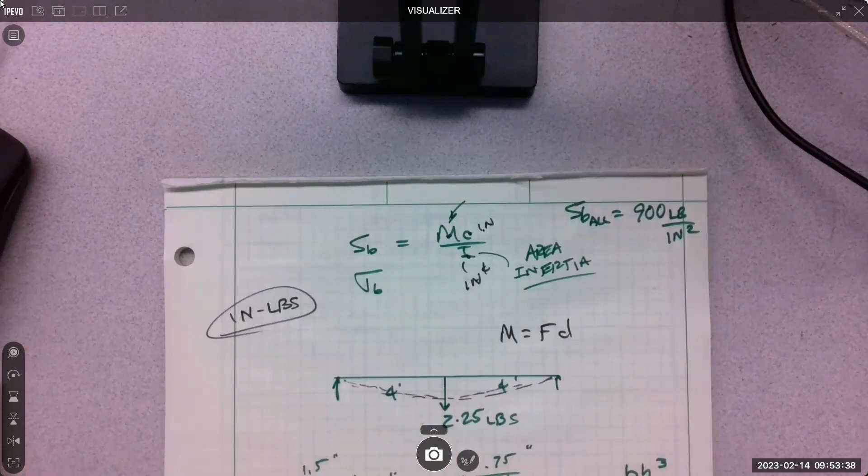Exactly. Welcome to engineering, this is the beginning. This is the simple stuff. Wait till you get enthalpy and entropy.

What? What do you mean? You'll take like 3 thermodynamics classes. It's crazy.

All right, force times distance, that's how you get torque. So force could be 2.25 pounds—that's our load.

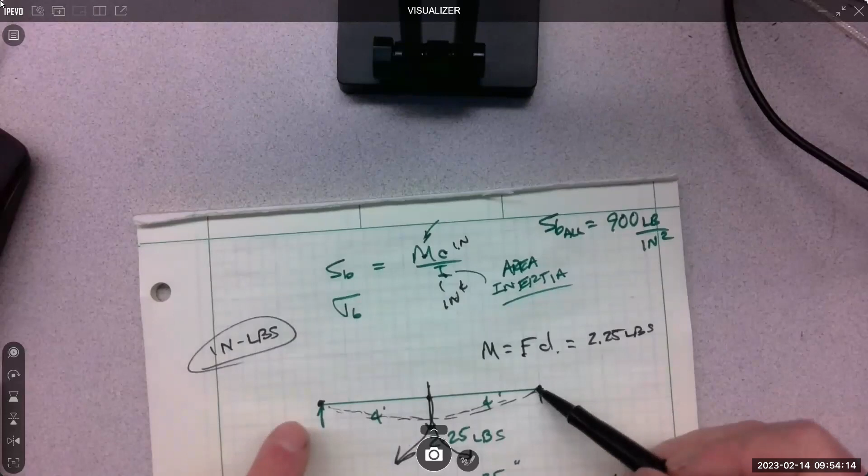And then it's acting at these supports. It's trying to rotate around that, and it's trying to rotate around that. It wants to go, correct? And these are allowing it to rotate—it's not fixed. When you push down, those ends curled up, didn't they? Yeah, so we didn't fix these ends.

So this force is multiplied by that distance, 4 feet. So it's 2.25 times 4 feet, and this is pounds, and that gives you foot pounds. And then that can go into there. No negatives, not doing negatives.

Okay, basic calculation. Now we do have a problem with units, don't we? Because we're inches to the fourth, and feet—yeah, foot pounds, that's not going to work. So the foot pounds has to be converted into inches, to inch pounds. Then you're going to have inch pound, inch—inches squared pounds on top.

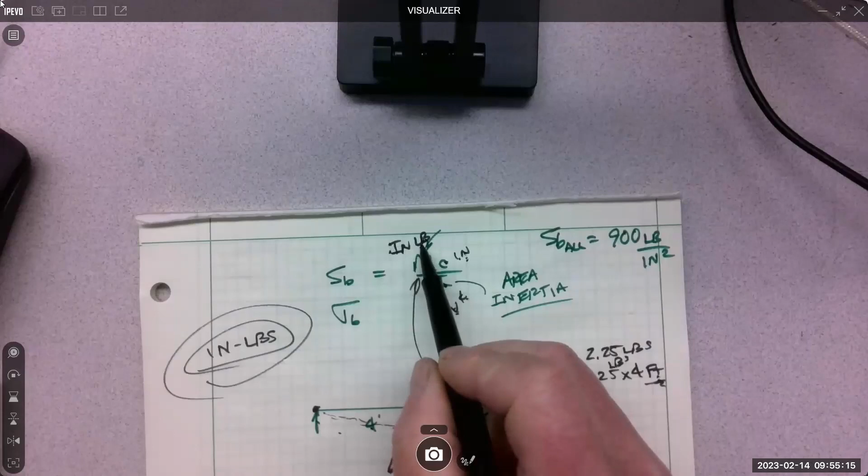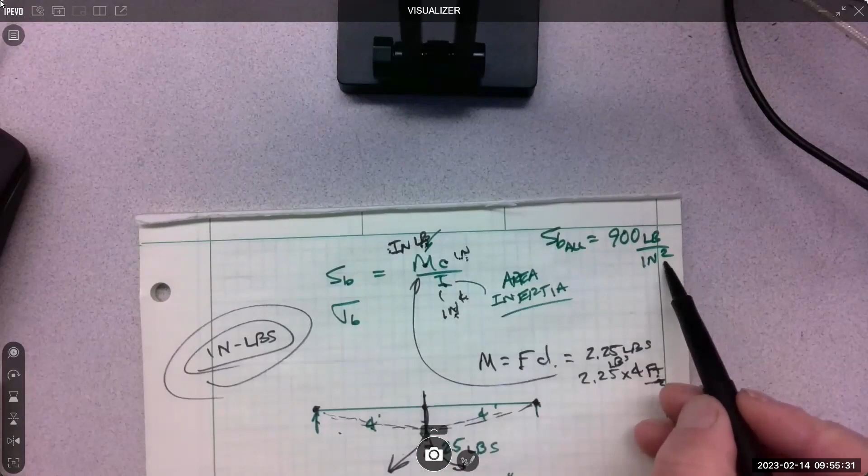Stay with these units, agreed? Inches squared pounds on top, inches to the fourth on the bottom. What happens to the inch squared and inch fourth? Cancel. We end up with what down below? Inches squared. We calculate this and we compare it to this.

And we have just done a structural analysis. Holy smokes—statics class in 1 hour or less.

You should be confused, I get that, but hopefully this is enough to get you like, oh, we can kind of limp along into a structural analysis document. You've got a week and a half to find me and say, okay, I got part of that, but we're confused on this area, and then I can clear it up for you, hopefully. Cool? All right, nice job.

I'm serious, that is a small snapshot of what your engineering education is going to be like for 4 years. You're going to come to statics class and get massively confused. Then you go away, try to clear that up, and come back and get massively confused again.

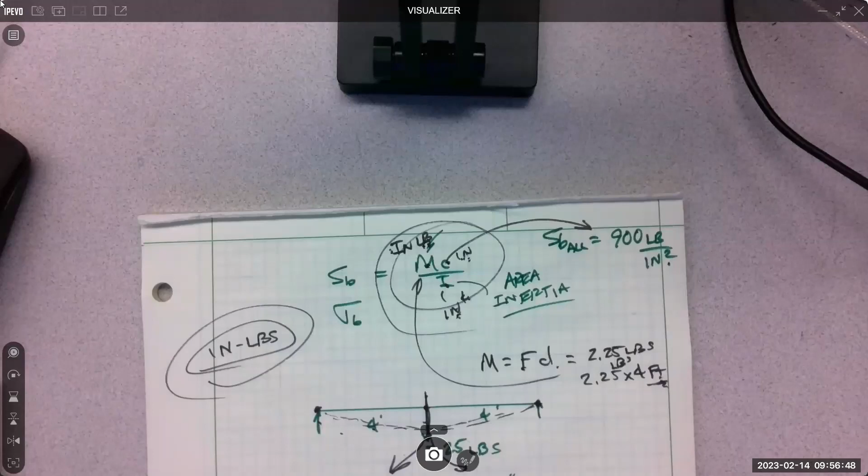Welcome to the wonderful world of engineering. No one else can do it, that's why you're here. The rest of them can't do it, they're in archaeology class. I don't know what else they're doing out there, but they're not doing this stuff. Maybe they're the smart ones—Ruben's like, let the engineers figure that out. Good job, everyone.